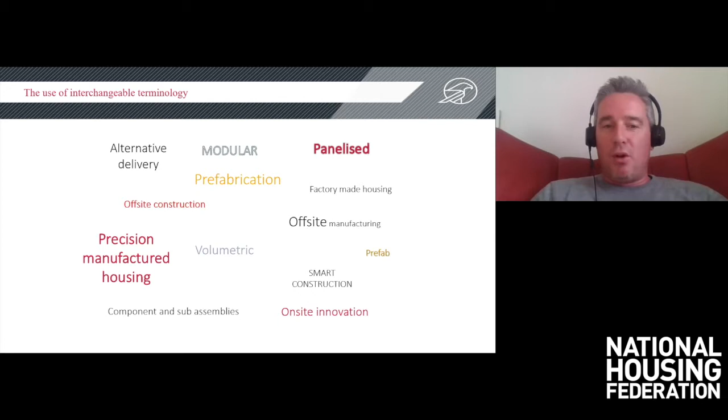I think the use of this interchangeable terminology has not been helpful, and for that reason, in the past year or so, MHCLG has brought out a definition framework to help people understand exactly what is meant by MMC. This is supposed to be a future-proofed definition framework, so it's also about where MMC might go in the future. There are 7 categories, and across these 7 categories you have various extents of pre-manufacture.

The thing that connects all of them is that there's an element of pre-manufacture - something happens away from site that is assembled on site. Category 1 is the element with the most pre-manufacture, through to category 7, which is effectively improvements that happen on sites that can happen on any site.

I won't labour these because you can find this online - if you Google MMC definition framework, this is the first response that comes up, so it's easy enough to find. But I do think it's important to set out exactly what we mean by MMC. It runs from category 1, which is what everyone kind of thinks of as MMC, through to modular housing units built entirely in factories and assembled on site, effectively stacked together and connected on site.

Category 2 is a two-dimensional version of the same thing, and you'll see this on traditional builds as well as what you might consider to be MMC builds, so framing solutions like steel or timber, SIPS panels, those sorts of things.

Category 3 are large format components, and actually have been around for a long time, so these could be roof trusses and staircases built off site.

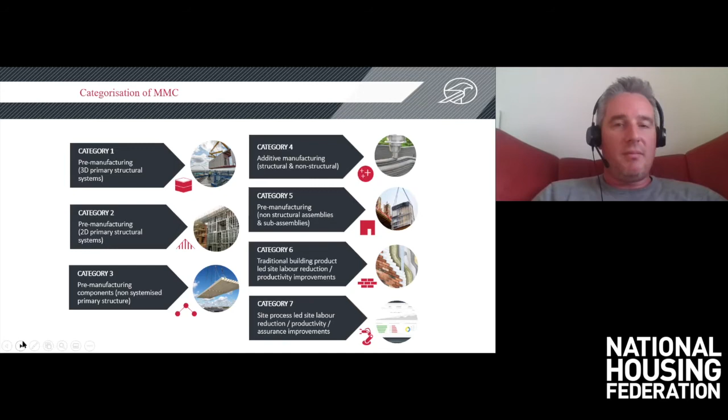Using that as a backdrop, and picking up the fact that the thing that connects all of these different types of manufacture is that they are to some extent built off-site, you get the benefits of factory manufacture, better precision and better quality of products. It's worth touching on just some of the main benefits.

Linked to that, there's something that comes in terms of quality from being able to build more quickly. The faster homes are built, either in a volumetric sense, entirely in a factory away from the elements, or even some of the other systems - framing systems, bottom left-hand side - we're talking about achieving a fast weather-tight envelope. The faster the building is weather-tight, the better control you have over quality, and the better final product you're likely to have. We're seeing some Category 2 framing manufacturers now starting to work towards getting wind and weather-tight within 24 hours on site.

So that as a backdrop is kind of what MMC is, where it is in terms of strengths and still the barriers that exist. The second thing I want to pick up on is what's driving its use now, and how far might that be driven - what are the issues and drivers out there making MMC increasingly picked up? Some of these are particularly relevant to housing associations, so I'll touch on those as we go through.

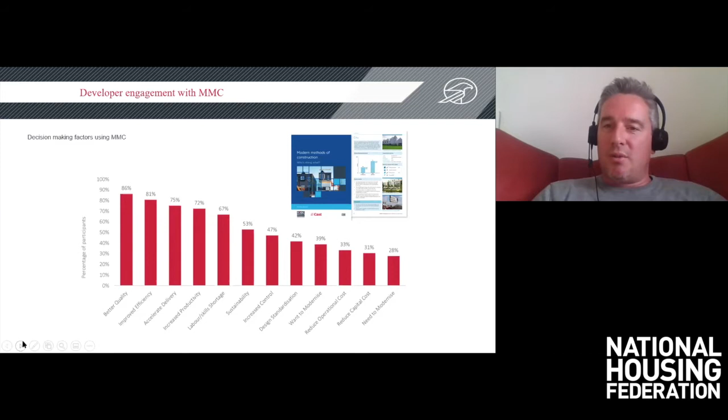The first thing is starting to see why developers are picking up on MMC. This is a survey we did a couple of years ago for NHBC, and we asked commissioners of MMC homes why they had chosen to commission MMC homes - the standout answer was because they were seeking better quality than they could achieve otherwise. This is starting to show that people engaging with MMC are looking towards it for a better solution than what they're able to get from the market anyway. So this backs up some of those points I was trying to make before. Now obviously there's strengths and weaknesses with any system, and this is an emerging system as well, so not everything will be perfect, but the general sense is that MMC is a solution that will drive better quality, and therefore important in terms of long-term asset ownership and management.

It's important to think about COVID, and actually what we're finding is that COVID is starting to become a bit of a driver for MMC as well. So what we found from COVID is interesting, that site productivity actually fell, as you might expect, because of social distancing and physical distancing. You can't get the same number of people onto sites, and teams can't operate on sites in the same kind of way. We found that most sites actually kept going, but productivity on a site basis was down.

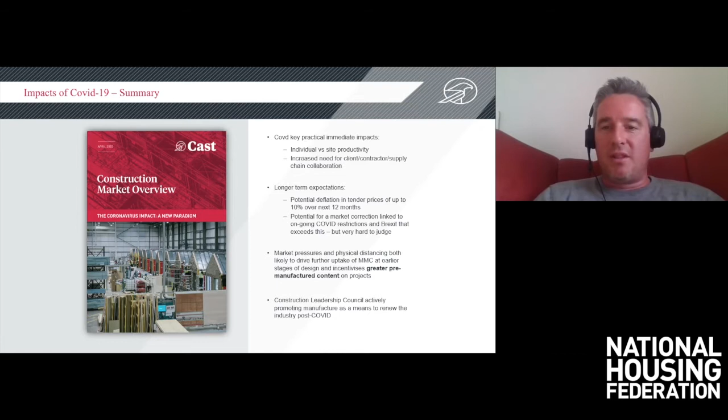And to back that up, you can see the comment at the bottom there, that since the COVID outbreak, the Construction Leadership Council is now actively promoting manufacturing housing as one of the measures to renew the construction industry after COVID. So this is starting to be picked up as an industry-wide driver of change.

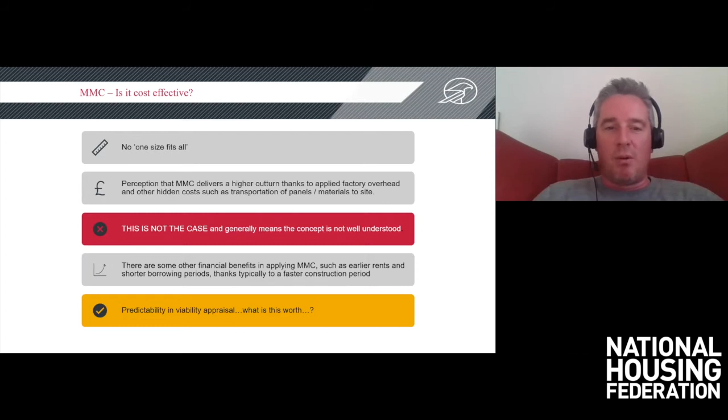But a particular benefit to, I should imagine, housing associations, because of your financing and your need to invest and keep your investment rolling, is speed. And to try to set out exactly what I mean by that.

So here I've tried to show how a traditional construction program would vary from an MMC construction program. The left-hand side, the red bar is the design activity that takes place for an MMC project, and then the black blob is the delivery activity that relates to that. On the grey long line is the design activity for traditional construction, and the orange blob is the traditional construction delivery process. And the difference here is that the design aspect happens a lot sooner with MMC.

It's all done pretty much before anything goes into manufacture, which can be a challenge for clients, because you have to be ready to work with that and to make decisions sooner. But what it also means is that when you go into production, things happen a lot faster. Whereas in traditional construction, design, as we know, carries on through the development process for a much longer period. What this all ends up delivering is a significant time saving on offsite compared to traditional construction, which is the line at the bottom right hand side.

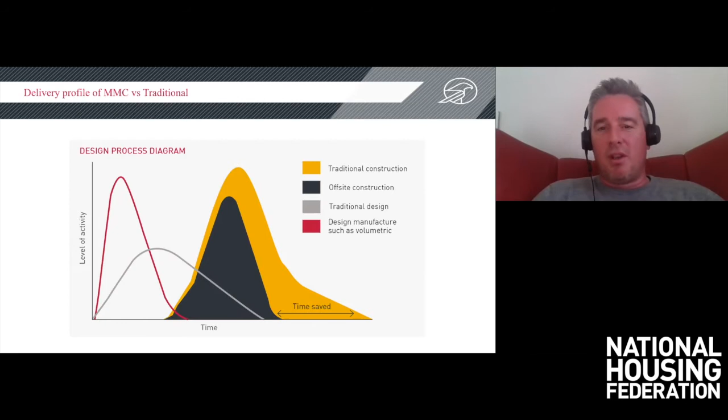And I thought I'd pick a case study to try to exemplify that. I've gone for the biggest case study I could find. This is George Street in Croydon. It's the world's largest modular tower, but it does really sort of reiterate the point here.

So this is a 44-story modular tower that was completed in 26 months by Vision Modular and Tide Construction on behalf of Greystar, and probably would have taken 48 months for a traditional build to achieve the same sort of development. So a saving of nearly 50% in terms of time, and generally we see a third to a half as the time saving that can be achieved.

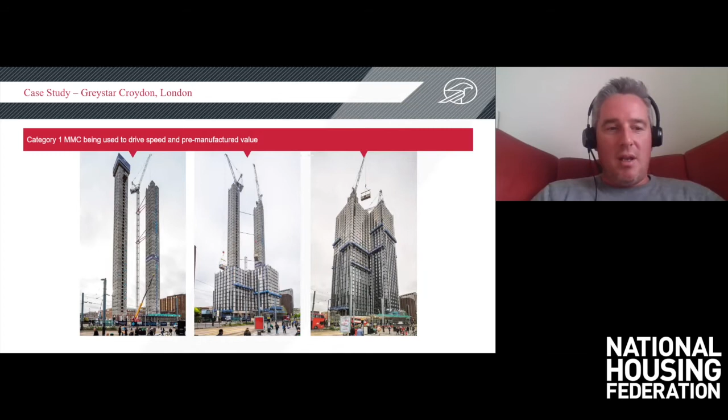That means the investment is repaid sooner, can be used somewhere else sooner, and that all improves viability modelling and appraisal. The second part I wanted to pick up on is around regulation relating to asset management and ownership, and how MMC plays into that.

First point is around building safety reform, building regulation reform in that regard, and the creation of duty holders responsible for creating and maintaining a golden thread of building information. The golden thread will be held digitally and ensure that the original design intent and changes are captured, preserved, and used to support safety improvements.

Now, this is not an argument for MMC per se, but it is certainly the case that homes that are designed digitally using a BIM approach from the start, then manufactured digitally and delivered on site, are better placed to enable a digital thread. They start from a stronger starting point than developments that don't happen in that way. So it's another enabling factor for MMC.

Similarly, the Future Homes Standard aims to achieve 75 to 80% carbon reductions by 2025. It's very hard to see that sort of step change being achieved through traditional construction alone. The tolerances and quality achievable in a factory setting, along with all the other benefits I mentioned around waste, are more likely to help towards achieving those sorts of standards.

And we are starting to see quite a lot of interest in MMC as part of a solution towards zero carbon. I wanted to give another example of that: Goldsmith Street in Norwich, which won the Stirling Prize earlier this year. It's talked about as a great social housing and affordable housing scheme, but it's not often talked about as an MMC scheme, though it is in fact an MMC scheme.

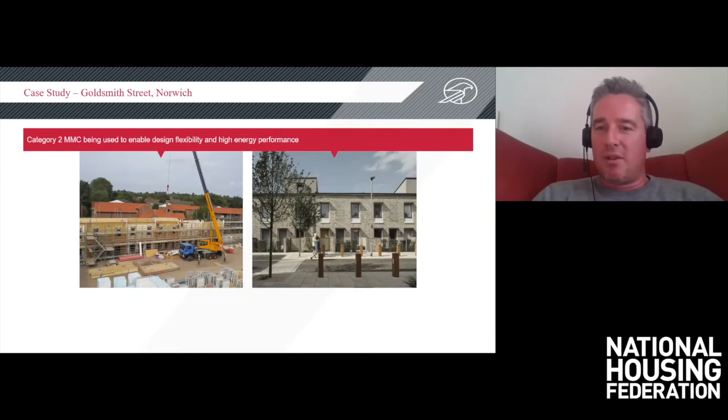The final thing I wanted to pick up on is this really interesting case study done between Magna and South West Procurement Alliance, looking at long-term asset performance with different types of manufactured housing against traditional housing. They used real cost data for MMC homes with some assumptions about long-term performance. I think this is searchable - you can find this on the internet, the case study that sits behind it.

This is the first example we've got of really accessible, good data showing how, over a 30-year business plan, because of the quality benefits inherent in the build and fit-out of an MMC scheme, the reduction in R&M cyclical costs outweigh any initial increase in capital costs associated with MMC delivery. So that creates a 30-year business plan benefit because of quality and taking a different view about procurement.

This is kind of leading up into what Robert's going to talk about, I think, but basically trying to make the case here that to be getting into MMC well, and to be procuring it well, you need to be thinking about long-term costs as well as upfront costs. You need to be thinking about how you procure it in slightly different ways to recognise that - how do you recognise benefits like faster return on investment, better environmental performance, or better asset performance?

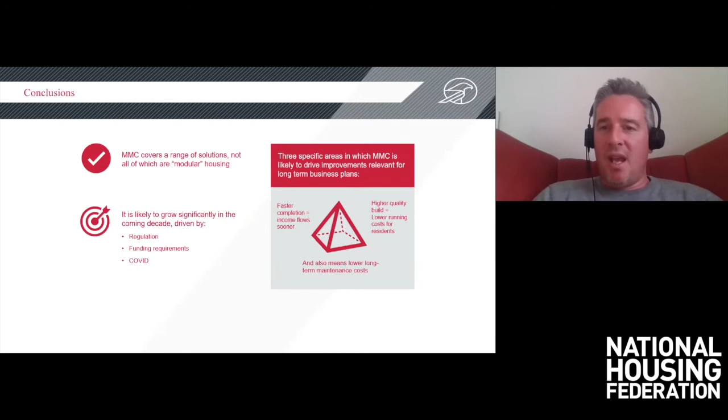And with that, I'll hand over to Robert for his presentation. Okay, thanks a lot, Jeff.

So my name is Rob Peck, Director of Procurement Services, Procurement for Housing. We provide a range of procurement and consultancy services, and we're delighted to be appointed as procurement partners for Building Better, where we are aiming to deliver a range of procurement solutions that will hopefully make MMC more of a mainstream option for construction moving forwards.

In terms of my presentation today, I'd like to cover a quick view of MMC in the housing sector and what that looks like to date, and also highlight some of the manufacturer feedback we've had through our dialogue to outline what the current framework landscape looks like for MMC and some of the challenges there. Then I'll move into what our approach will look like and the desired outcomes we're hoping to achieve through this procurement exercise.

Just to start off, in terms of the current MMC landscape within social housing, I think it's fair to say there's probably never been more energy, positivity and interest in the role off-site manufacture can play in solving the UK's housing shortage and stimulating the economy both during and post the COVID-19 pandemic. As Jeff alluded to, we're getting feedback suggesting the pandemic could well prove to be a catalyst for MMC due to increased safety with production in a controlled and safe manufacturing environment and reduced labour on site.

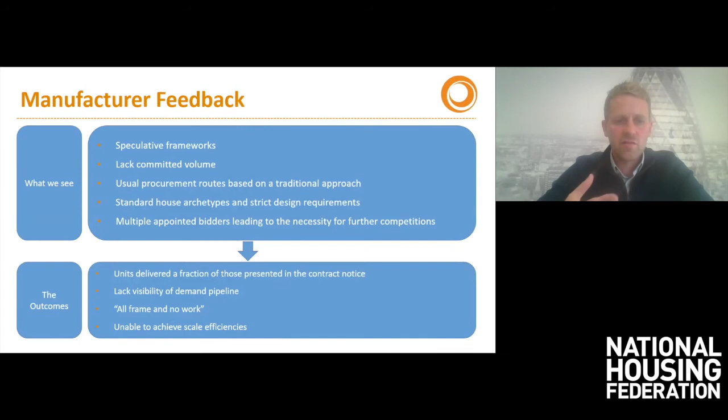As part of our dialogue and pre-market engagement with manufacturers, we've had feedback to suggest that many frameworks in the market at present are speculative in nature, lacking any form of real volume commitment, and in the majority of cases have often delivered a fraction of the advertised potential demand, and in some cases nothing at all.

Feedback also suggests a degree of frustration for manufacturers with the procurement process itself, with many procurement projects often utilising an approach and documentation more aligned to traditional construction practices, and it's felt that they don't demonstrate a full understanding of the off-site construction environment. The result is often a procurement exercise which can fail to extract maximum benefit that MMC has to offer, through a series of misaligned demands or requirements set out within the tender documentation.

A further challenge exists at point of call-off as well. Typically frameworks have a significant number of manufacturers appointed, and landlords are often required to run mini competitions or further competitions to make an award. Now, whilst there's nothing wrong with that approach and call-off procedure, the reality is that it's another barrier, another hurdle, and it adds further time and complexity into a process that could be streamlined to allow earlier manufacturer involvement, given the right framework structure and environment.

The feedback we received also suggested that MMC frameworks are often all frame and no work. And we feel that this really encapsulates the feeling of frustration conveyed by many manufacturers. You've got inefficient demand forecasting, a focus on small scale sites, a lack of standardization, and it's created an environment where many manufacturers are feeding back to us to suggest that they are unable to achieve maximum scale efficiencies. This has played a real significant role in our thinking in terms of how to design the framework and how to design the procurement process to extract maximum value.

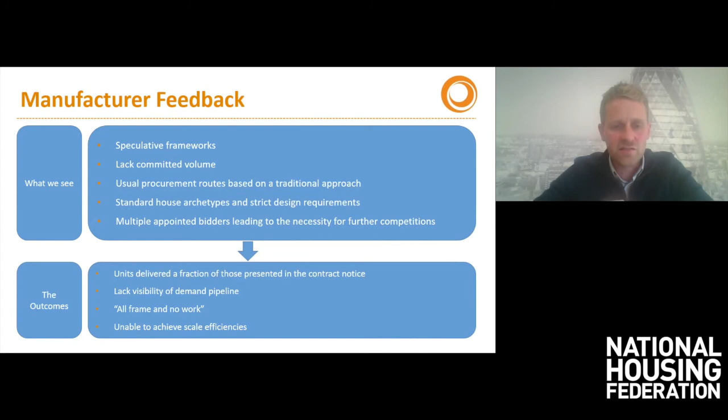So we've been really clear from the outset that we wanted to procure a demand-led solution with a volume commitment that really has manufacturers at the heart.

As a group, we have clarity in relation to the headline objectives. We know that we want to push the boundaries and tick multiple boxes. And we know that we want to do a lot of heavy lifting at the procurement stage in order to accelerate and simplify the call-off process for the end user and for the manufacturer.

Our minimum requirements have been defined, and we've been able to develop a red line document that captures a series of pass-fail elements aligned with our values and objectives. However, at the same time, there are a number of aspects where we feel dialogue with manufacturers will be hugely beneficial in terms of helping us test, refine, and shape our final requirements into a format that's understood by all parties and that draws on the expertise and insight that the market has to offer.

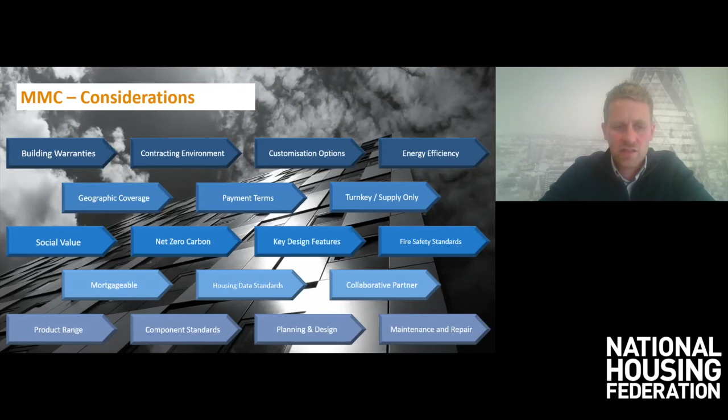So in light of the fact that there are elements that we wish to discuss with bidders as part of the procurement process, we felt that the greater flexibility offered by the competitive dialogue route made it the most appropriate procurement route for us instead of the more traditionally used open and restricted processes. But some of the key reasons behind that, flexibility is absolutely key. Competitive dialogue is really well suited to procurement solutions where the contracting authority has a broad outline of what needs to be delivered, but would benefit from shaping the specific details in collaboration with the market.

We were also mindful that we're working with an emerging and continually evolving market with a variety of solutions, approaches, innovations, and so on. And we wanted to listen and learn as part of this process. It's essential that we understand what the market has to offer, and understand from a supplier perspective how we can extract maximum benefit.

From a cost, time, environmental impact perspective, there's also a need to develop our requirements as part of this process.

As previously mentioned, we've got clearly defined red lines and aspirational targets that articulate our headline requirements. However, the specific final requirements may not have been fully established in every single area. Through structured dialogue with shortlisted bidders, we have the opportunity to explore and refine our requirements prior to issuing the final invitation to tender.

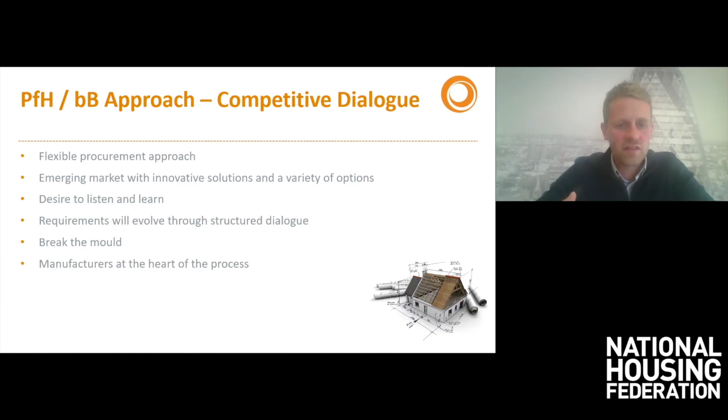In terms of desired outcomes, we're underway with the procurement process at this point in time. The intent is that we will develop framework solutions initially for volumetric systems, then moving on to panelized solutions later in the year, ultimately supporting the shift in positioning MMC as a mainstream solution for new homes. We aim to push the boundaries of design standards with innovative, future-proofed solutions, and to achieve the highest environmental and sustainability standards with homes that are cheaper to run and maintain.

We're seeking to appoint innovative, high-quality manufacturers aligned with Building Better's values of collaborative working, a desire to jointly solve problems, and a commitment to exploit innovation and maximise customer satisfaction.

Our intent is also to deliver a solution that provides price certainty and a mechanism for ongoing price reduction during the lifetime of the framework, along with an agreed menu of pricing for a variety of customisation options.